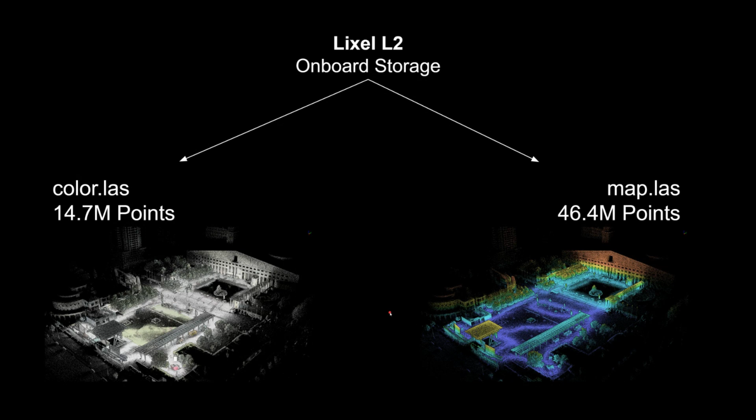So in some cases, this may be good enough. Like if you're doing forestry work, I suspect that this may be good enough, especially if you have RTK on the equipment and you have geopositioning in real time as well. I think you can probably just skip the other type of processing that you can do here. Here's the point cloud. Here's the uncolorized one with 46 million points. And you can see in this profile section of this tree that it's quite dense. Like there's a lot of density here.

I've used other SLAM handheld scanners. They all typically produce some sort of real-time result. But I always find those results to be something that's just like a thumbnail, essentially, like a quick little preview of the point cloud and not really meant for use.

So they're typically very sparse. And I was surprised to see here that the full geometry of the tree was there throughout the entire scene. It looked like what you sometimes see in a fully processed point cloud from a scanner. There's obviously a little bit of point smoothing occurring, but it's done tastefully. It's not aggressive. It's not completely obliterating corners and edges.

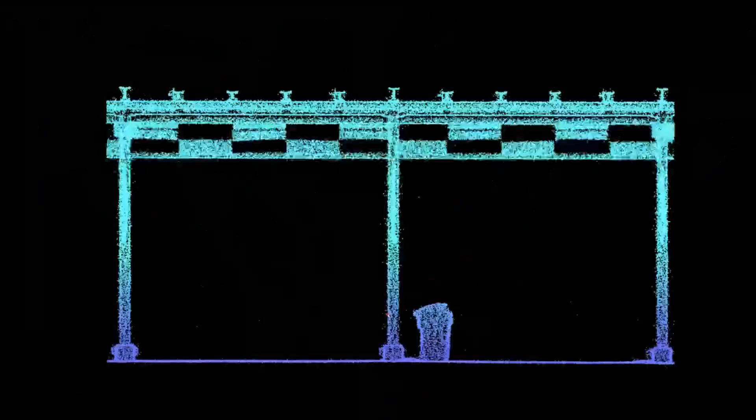I'm generally not a huge fan of smoothing, but because it was just lightly done, just a little bit of tweaking, I'm okay with it, and I think it overall improves the quality of the data. And some other geometries that I found interesting is that it's quite precise from the real-time point cloud. Again, this is the point cloud that was just on the SD card on the L2. Just copy paste, open on your desktop, and this is what you get.

So you can see the geometry of these support beams, these I-beams up there. Probably good enough for line work, I would say, depending on what the project specifications are and the requirements that you're dealing with. But you might be able to just skip a lot of that post-processing that would be typically required to get to this point.

Looking at some precision, of course, SLAM is never going to be as precise as a terrestrial laser scanner because it's moving, right? Anything that's moving and trying to simultaneously map and create all this data, there's just a lot more bias involved in those estimates. I'm looking here at profiles, very thin, I think about 2 centimeter thin profiles of wall sections. And I found that the real-time point cloud varied between 2 and 3 centimeters.

So I'm just drawing a horizontal line here from edge to edge on sort of a best fit between these. And you can see 2 centimeters delta X and 2.8 centimeters delta X on this other side. So for a real-time point cloud, I was impressed. This is already a pretty good start, especially considering that there's no other processing required at this stage.

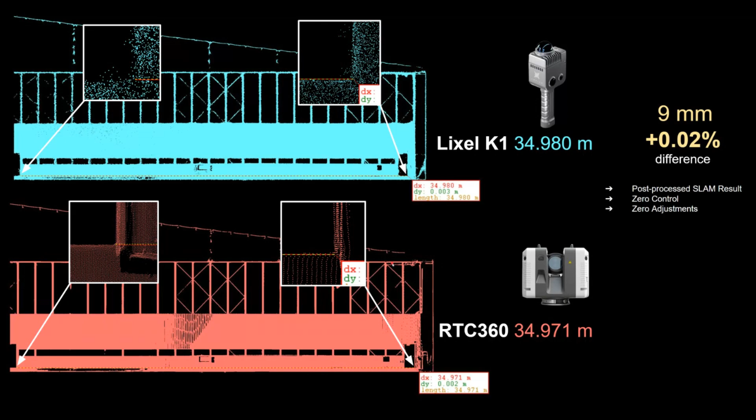Happy to share this as well for anyone that wants to do their own assessment. Of course, precision doesn't really come close. The RTC 360 is just a beautiful point cloud. But again, one of them you're walking with in your hand, and the other one's on a tripod and costs $90,000.

So then finally, the fourth deliverable that is possible is the Gaussian splats, right? What we're all here for. That is done through LCC Studio. So that's another application that you guys created on your desktop. And the workflow is the exact same. You take the project files from the scanner itself, open them up in your desktop on LCC Studio, and select the quality level. It's like 3 options, and just hit go and wait.

Gaussian splats are a novel view synthesis. There's AI training involved here. You need a GPU, and it does take much longer. It's not really comparable to LiDAR processing, but the result is really, really incredible.

And this is kind of like one of those cases where every time I saw a Gaussian splat, I was like, wow, this is amazing technology, but I can't really see a situation where it's useful in an engineering or construction or geospatial format, because it's very difficult to get scale right, to get accuracy right. And we'll talk more about what goes into this, but in this result, you get essentially comparable accuracy to the LiDAR data. You get that built right into the Gaussian splat.

And I didn't have to do anything else. It was the same exact walk. I didn't have to have another camera with me. Didn't have to build a rig. I didn't have to worry about the aerial triangulation or the photogrammetry process that all Gaussian splats start from. It was just so simplified.

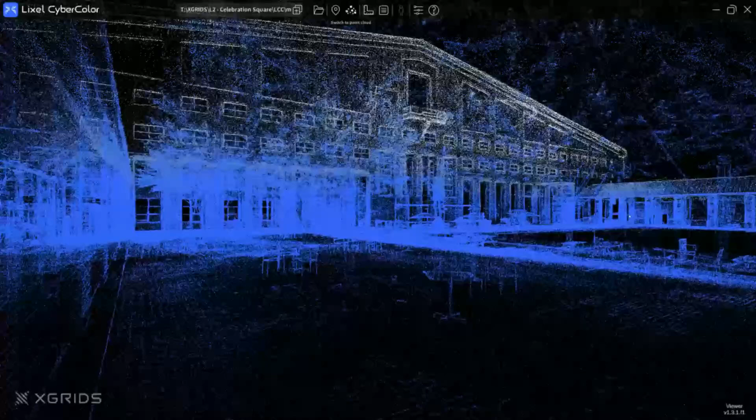So what we're actually doing, well, actually, we're the very first in the market to develop this SLAM-based Gaussian splat generation. Originally a lot of what we see is based on visual images, but we incorporate into one the point cloud, and also our expertise in inverse rendering as well. So what we're actually doing is that we first process the point cloud, and naturally that already can feed into the training very good structural information as well as pose information.

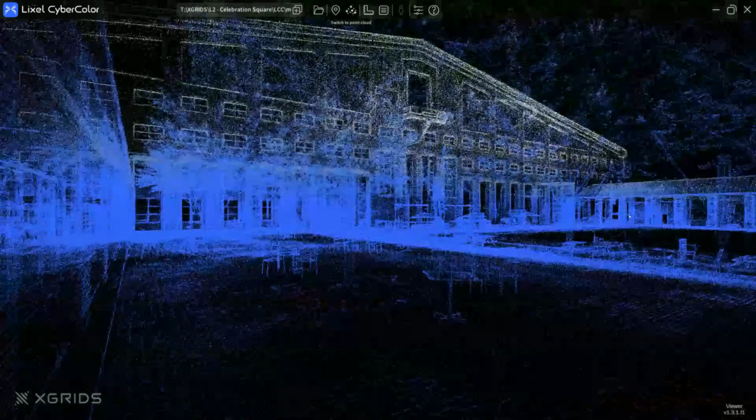So naturally we do the point cloud processing first. And then of course, with the imagery and the inverse rendering piece, we are also feeding very high quality colorized data for the training of the Gaussian splat. So what you're seeing here essentially is the Gaussian splats overlaid with the point cloud.

But this is basically the point cloud that's being used as the structure and the pose information for the Gaussian splat. So it's naturally not the full point cloud as you would see in the Lixel Studio, the higher dense version. Yeah, because there's no need to have those 174 million points here. We just need the ones that are edges and corners and filling in those geometries within.

And I also noticed that there's some points in these splats that are probably not coming from the laser itself, but are points that are generated from the images, because they appear in locations that I know the laser wasn't really able to see, or wasn't able to see far enough, like with the K1. So that's really interesting how this fuses together.

It's the first time that I'd seen this technique, and before this I hadn't even really considered it as being a possibility. But kudos to you guys for coming up with this, and I think we're going to see other OEMs and other manufacturers adopt this type of methodology as well, because it's already all there. Like a lot of these scanners already have cameras. They may not be integrated to the point where they need to be today on these generations for it to work this well. You guys kind of have been working on this since the beginning.

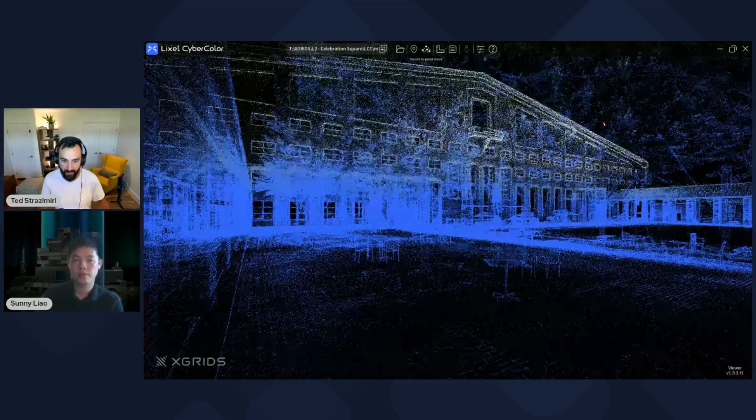But I can see future generations of hardware very quickly starting to also incorporate this type of feature, because I think once you see this, it's really hard to say that this isn't very valuable in this field and in these situations. Exactly. One of the other benefits of this is just the overall quality of the splat. You just have more initial information about the scene, right? So the inferencing and the training that's involved afterwards generally ends up being of higher quality.

I didn't really see floaters like that. That wasn't a phenomenon that showed up. Photogrammetry is still involved in splatting. We still need camera alignment. It handled areas where camera alignment probably would have failed or produced big gaps of data, and handled that very well because the LiDAR was there to support it. Can you give us a little bit of a background on what we're looking at here?

Right. So essentially, we're leveraging the expertise of the multi-SLAM piece. Like you said, there's definitely going to be a lot more people trying to put them together, but at the end of the day, it's really the algorithm to be able to use the data precisely and to align them. And what we're feeding into the training piece is the better structure information, also the better lighting. So that's allowing it to train successfully and be more robust. Therefore, we are able to do much larger scenes, not just simple rooms, but bigger sites, so that you can train the data and get the data in a much more efficient way.

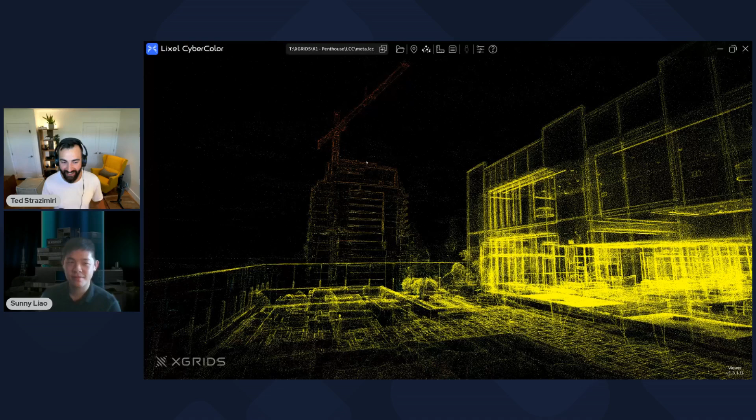And so here's an example of what I said. These are sort of like hybrid points. When you switch into the point cloud viewer, this building is in here. I know for sure that building is beyond 40 meters away. Right. So there's no way that those points came from the laser scanner. So these points must have come from the photos. And sure enough, you confirm that.

And there's also a skybox option when it's being processed. In this version, I didn't turn that on. But if you do, you have a full skybox and it looks like you're outside. So really, really incredible result from like 10 minutes of walking, and great dynamic range as well on those cameras on the K1. Challenging scenario with a lot of backlight and also indoor light in one scene, and the scanner handled it really well for this result.

So going back, here's another example. This is the hangar, and the great thing about Gaussian splats and these methods is that they're very lightweight. It's not like sharing meshes and point clouds anymore. This is actually viewable in a browser. So your LCC tool allows you to publish and generate a link, and you can share the link with anyone. And this is the link opened up on my Google Chrome right now. So it's running. Again, great performance. I think it's slightly downgraded in terms of quality, but you can also enable a more detailed version of it. I'm not going to do it right now, just in case my system can't handle it.

But I think inherently this is another huge aspect of why these neural radiance fields and these splats are going to make a pretty big impact in the field, because sharing is always one of the hardest things to get right. We're creating amazing data sets, but we're still struggling to share them efficiently. I've said it a million times, we're competing against the PDF file format. Everyone just expects things to open in an attachment, right? And so this is inherently different from that, and it works really, really well.

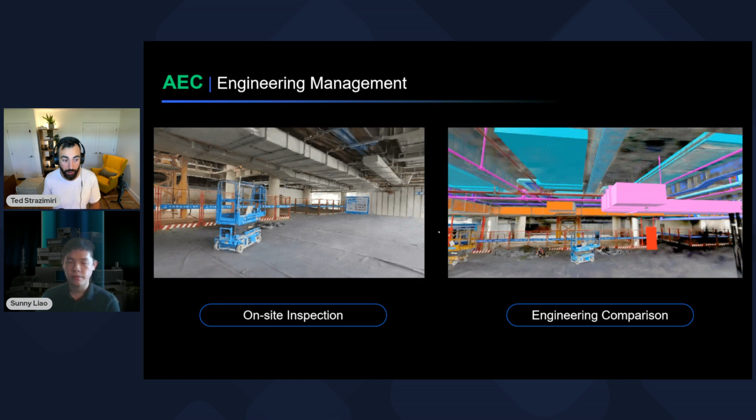And then design, right? Taking that same data, because it is dimensionally robust, bringing that into other tools like Revit or AutoCAD, and blending that in with other assets and models in a BIM style. For visualization, for planning, for design, I can see this opening up a lot of opportunities, and I'm sure a lot of gears are turning out there building these tools. I know that you guys are building something. You sent me this last night, and I brought it into the slides really quick, but walk me through what we're looking at here.

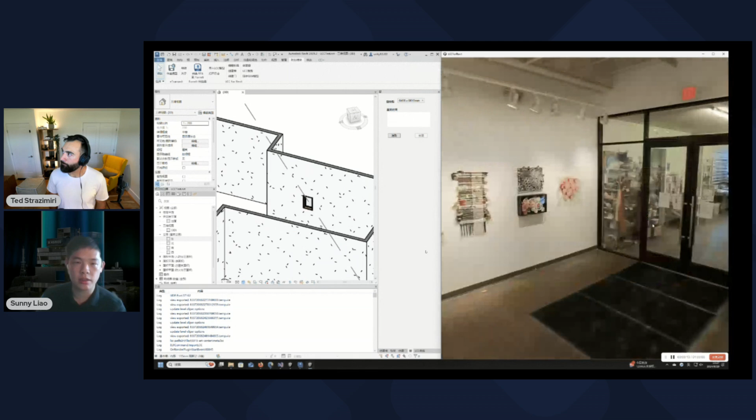Yeah, so essentially this is a demo, but we created a plugin for Revit. So inside Revit, you can directly open up the LCC format, the LCC model, our splat model, and then with just a few simple clicks, letting it know where the floor is, where the ceiling is, where the corners of the wall are, we'll be able to generate the model directly in Revit, just by looking at the LCC model itself.

And then vice versa, I think it showed a little bit there. You can compare what's being built inside Revit to the actual splat model. So kind of compare design and what's scanned there. That's something that we think is going to be actually useful, because this is what you would actually see there on site. And then from there, create a model directly in Revit.

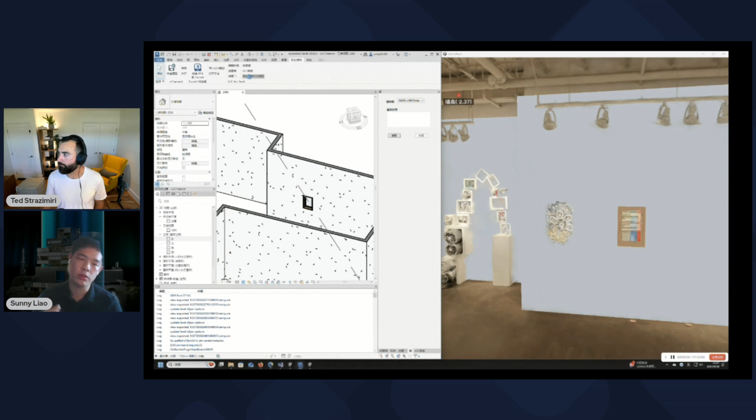And then the next steps: this is just a demo, but what we're trying to do moving forward is, everybody's talking about AI, and that's definitely what we're trying to leverage. Naturally, we'll start working on segmentations and classifications based on the splats. So moving forward, we'll try to get to a point where we naturally know the floor is the floor, the wall is the wall, window is window. So with a few clicks, you'll generate the model automatically, and then you can do the editing and compare that with the scan data.

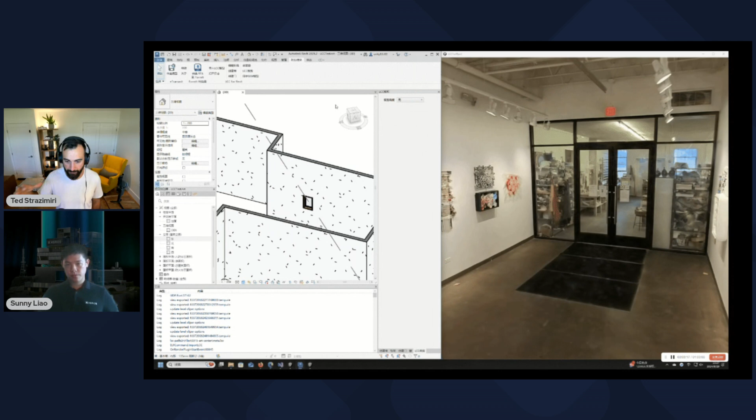Yeah, cool. Wow. Okay, so even segmenting objects and features. We're used to segmenting in point clouds, but doing that segmentation in the LCC, in the splat, and maybe you want to display just a cabinet or just one section of a location, or maybe just the walls without anything inside the room. That's going to be more automated.

That's really cool. I'm not a Revit user myself, but I commission Revit work from experts, because it is such a complicated piece of software. But I can imagine that this is really beneficial, because point clouds are still just point clouds. Sometimes it's a little bit hard to tell what's going on, especially if they're really noisy. And I can't see someone not wanting to use this, especially if they can rely on it to the same degree that they can rely on their point cloud.

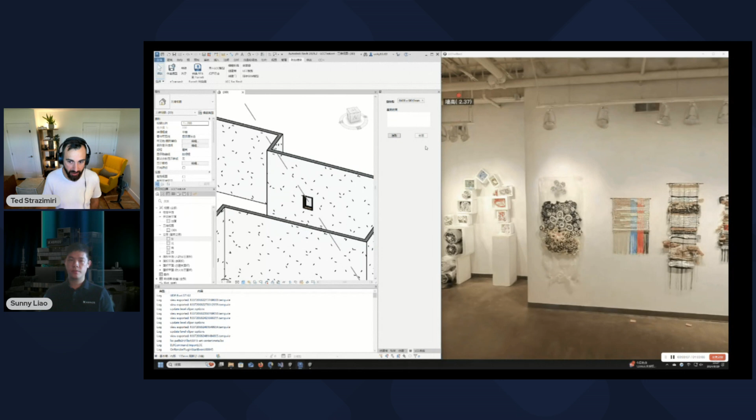Cool. So let's now talk about what you guys just announced. So the L2 Pro, this is it. And I see a 0 and a 1. I see a 0 post-processing. You guys are very anti-post-processing. I love it. But you still give us the option for post-processing, which I'll always take.

And then 1 millimeter point spacing. This is kind of wild. We're not talking about accuracy, we're talking about point spacing. So like density, right? Correct. Yes. So with the L2 Pro, we just launched this last month, probably 3 weeks ago at Intergeo. So we're not anti post-processing per se, but we do believe that everything that's more real-time and onboard processing will give you increased efficiency, and that's what SLAM is doing.

It's really simultaneous, right? So what we're actually doing is that we've enhanced the algorithm, we enhanced the processing power on board. So right after the scan, you basically will get pretty much the post-processed quality of data that you would get from the previous version. So that greatly improves the efficiency of using the data. And in terms of what the post-processing can do, it's about getting the next level quality of the point cloud. So that's where the 1 millimeter point spacing comes in.

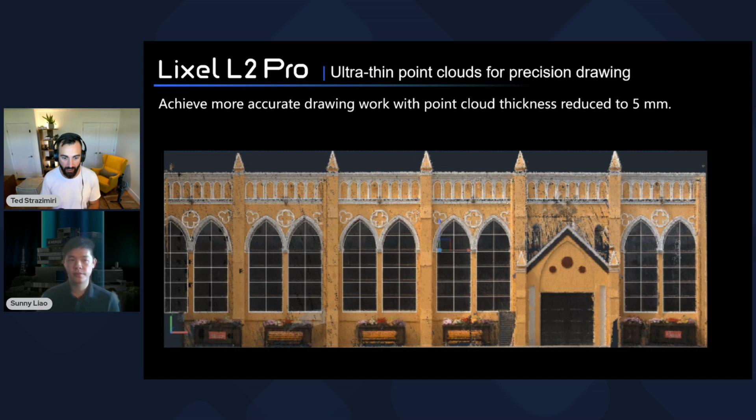Cool. So it sounds like, for a fairly new entrant into this business, you guys have quite a stable footing already. We have the hardware, which you guys call Lixel. We have LCC, your term for the neural radiance fields and the Gaussian splatting. Everything is, from my experience, super easy to do, especially on the PC side of it. It's 1 or 2 clicks, but also gives you opportunities for customization if you need it.

You have a local viewer, right? You can view it locally, you process it locally, you can also share it externally online. I think you're going to be doing more with the online portion of it. I haven't really seen much about this, but that's always a great thing. But one thing that gets me really excited is the SDKs and the plugins, and bringing this into other software and other workflows for users.

Correct. So we want to focus on the generation of the 3D content, with the data collection and data processing. But we want to enable the community and the developers to really develop the final applications of how to use this kind of data. So that's why we are developing the SDKs for Unreal Engine, for Unity, and also for WebGL platforms, for those who are developing their applications and want to use the Gaussian Splats results.